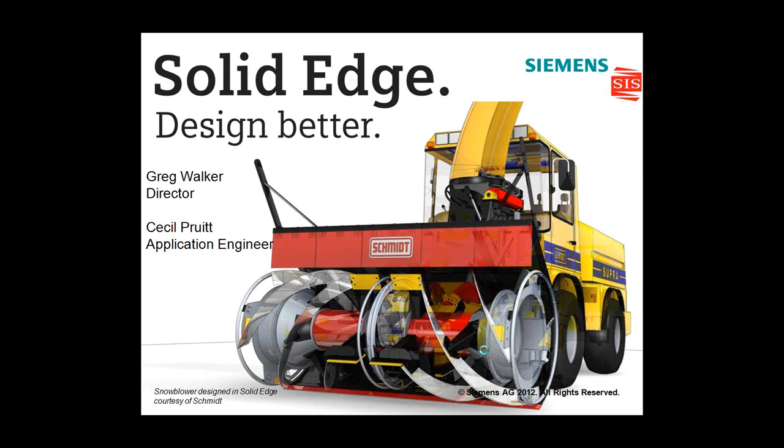Before we get started, for those that don't know, SIS has quite a bit of capability besides just the CAD/CAM/CAE support we do with Siemens. We're really divided into four sections. Part of our business focuses on digital data capture for reverse engineering, space configuration, factory layout, and that type of thing. Basically, whatever you need to get into 3D, we address, and we can do that.

We can prototype, and get everything from 2D or as-is condition in real life into a 3D environment. The other thing you're more familiar with is our capability and focus on engineering analysis—the CAD/CAM/CAE side. We're pretty much a Siemens shop.

So Solid Edge, NX, FEMAP, Teamcenter—basically the entire product line our team supports. We work with Siemens; we've been a partner since 2000, and we work heavily in the Mid-Atlantic and also with the Navy team specifically, so we have a lot of Navy background and experience. When you go down to the lifecycle management aspect, that's where we talk about Teamcenter Express, Insight, and Insight XT. Insight XT is a new capability with Solid Edge ST5, and we'll touch on that today.

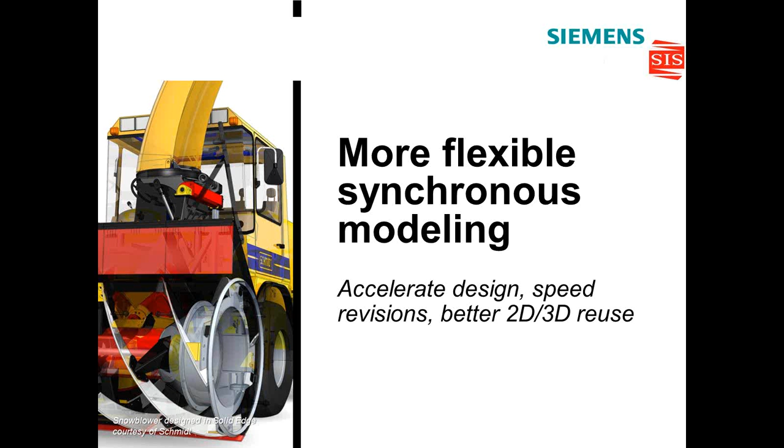If you are not a synchronous user, then hopefully you and I have at least talked so that you understand that everything doesn't have to be synchronous. But to not take advantage of some of its capabilities would be doing you a great disservice. And ST5 is just one more reason to take advantage of the new capabilities.

Within ST5, we've introduced some new functions you might not have ever seen before. For example, now we have included something called multi-body modeling. If you've ever encountered a file from another product, maybe even NX, where they have put multiple bodies inside one file, well, guess what - now we have that capability also.

And not only that, but we've pushed it up a notch so that we can even take multi-bodies within a single file and publish them out into assemblies. Very useful tool - I've even used that myself lately on some custom projects.

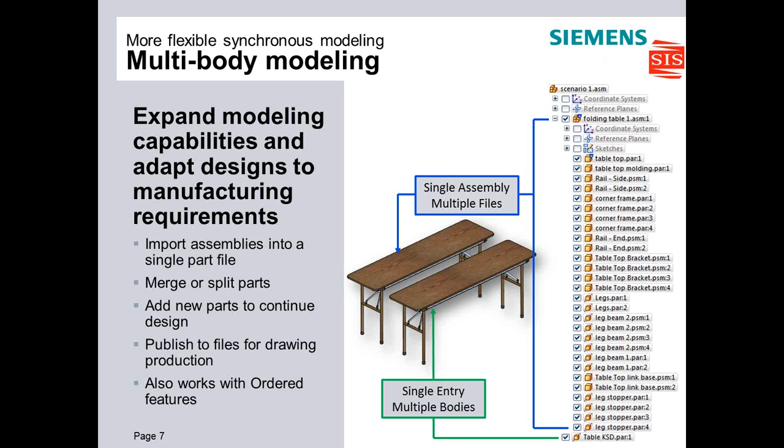You now have capabilities of being able to edit many procedural features from the assembly itself. No longer do you have to double-click or in-place edit into a part just to make a simple change.

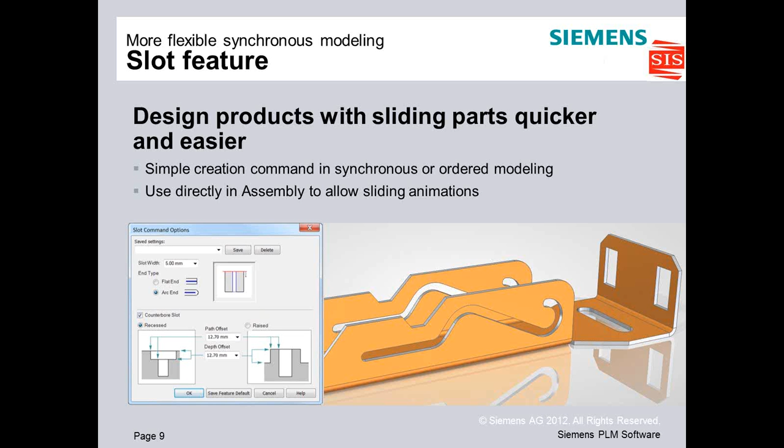We've introduced the new slot feature. Everybody has been asking for this for years now, but now we have it. The slot feature is very powerful. It has both negative and positive features. When I say negative, I mean we can do both counter bores and also boss type features within our slot command. Very nice feature to add.

We've now even introduced hole recognition. I'm very excited to show you this one. This ups the ante on product conversions, being able to do a translation from a non-Solid Edge part over to a Solid Edge part, and being able to recognize the holes as they come in is priceless. It's awesome.

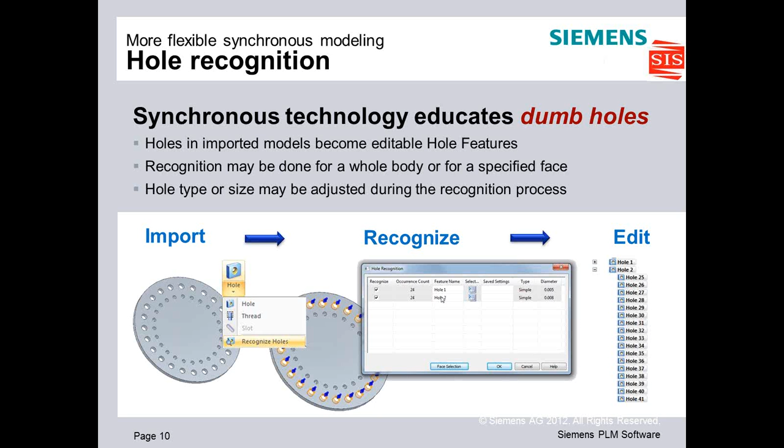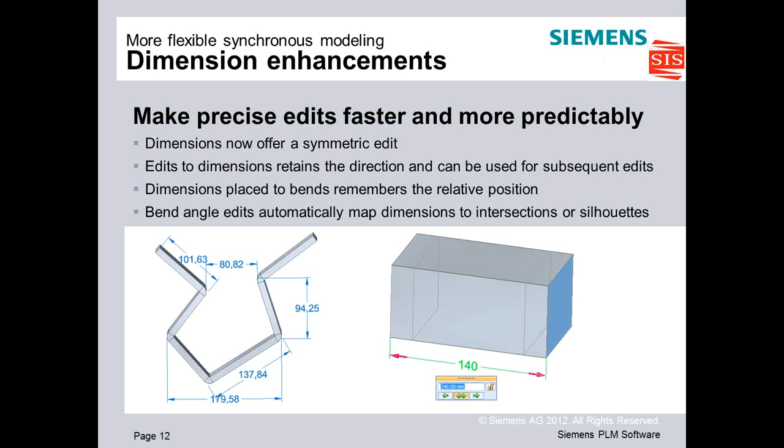We've now introduced more ways for dimensioning. In the past, we had the ability to dimension to intersections and theoretical intersections, and now we can actually dimension to the actual tangencies of things like sheet metal parts. I'm also pleased to show you that we can now adjust our dimensions symmetrically. Very cool stuff to show.

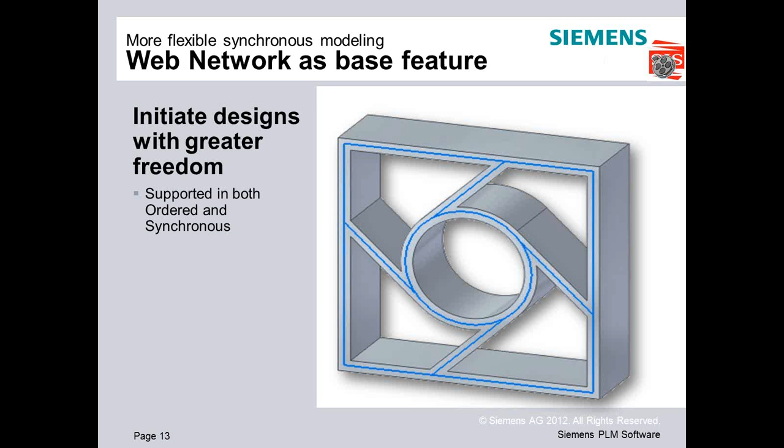A couple more here. I don't know a lot of people who have begged for this, but as I've started to examine the use of this tool, I can see where some people can get excited. We now can add web networks as base features. We don't have to have a pre-existing feature to add in a web network, which is kind of cool.

With that, I want to shoot off some really quick product demonstrations, and then we'll come back and do some things like steady-state heat transfer. So what I'm going to do is flip over to Solid Edge. I've got some parts already lined up because we want to try to stay within the time frame as much as possible.

This is something you'd normally see within the sheet metal environment as a contour flange. Whenever we think of this, we think, oh well, if I had to do this as a contour flange, I'd probably have to get rid of these corners. Or worse yet, maybe I want to keep the corners. So how would I get this done? What if I needed to do this inside a part environment instead of the sheet metal environment, which is kind of where I'm at? So it's not the typical runaround you'd go through to get this part.

It could be just as simple as reaching up, choosing web network, grabbing a chain, and determining both your thickness and your depth. Maybe we'll make this guy 5 millimeters thick, and we'll make this go out 20, that's fine by me.

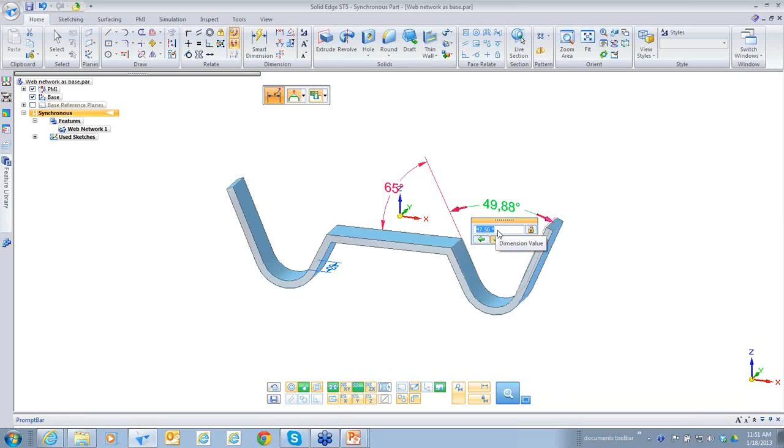Something interesting to get your appetite going. I heard Greg make a mention of someone saying maybe Solid Edge synchronous might not be right for you at this moment. With that said, the hairs on the back of my neck kind of prickled up, and I said, wait a second here. I want to show you a real world example.

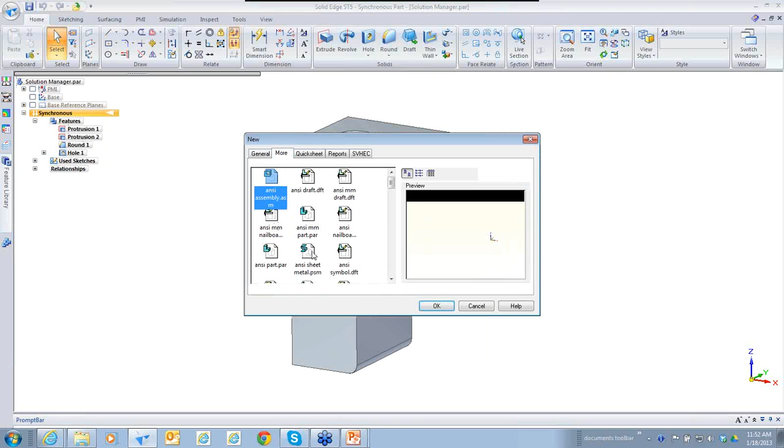Specifically, I have a CATIA part. This CATIA part, of course, makes no distinction between sheet metal and part. I'm going to go ahead and open this fellow up, and as I open him up, I'm going to bring him into the Solid Edge sheet metal environment.

And as I open this fellow up, I want you to take a look at the problems that are here. You might think, well, what problems, Cecil? This looks like a very typical piece of sheet metal, no big deal about it at all, right? Well, it's got some problems.

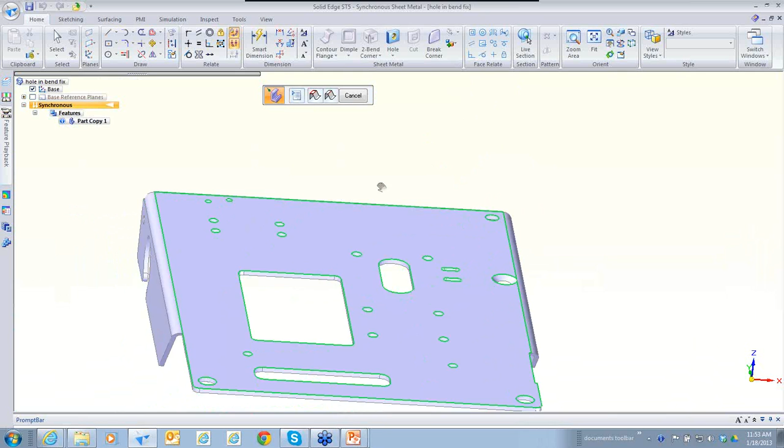First of all, if I were to reach in here and do my typical convert to sheet metal, I'm going to end up with errors. I'll say transform to sheet metal, grab it, and it's going to tell me there are non-sheet metal faces that have to be removed. Where in the world would that be? After examining the model this came from, I saw there's a countersunk hole transgressing a bend. That's not going to unfold. Not only that, but this bend is not quite what I want.

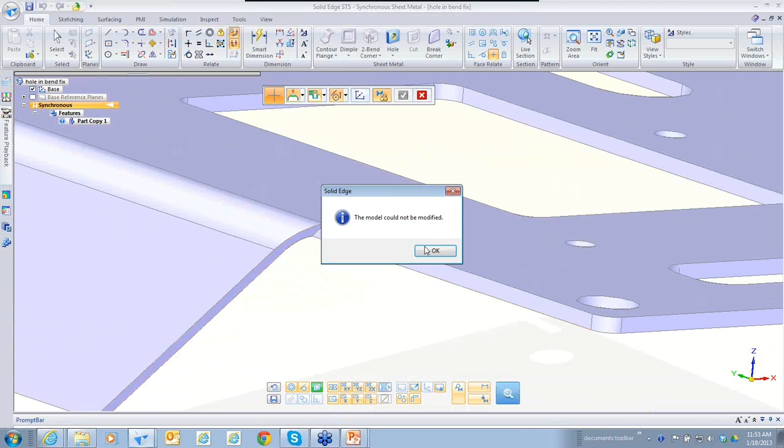So Solid Edge with synchronous gives us tools to come in and make very quick modifications. I might reach in here and say, hey, I really wish this face... well, let me try a perpendicular. Let's grab this face and make him perpendicular to this face. That was a very, very quick resolution to this. And from here, we could of course change it, modify it, do whatever we need to do.

The other problem, as I said before, was this hole. Let me go ahead and say transform to sheet metal again, and it's going to tell me again that I still have this problem. This hole is transgressing this bend. What can we do about it?

If you were working inside the synchronous environment, you have a solution. If you were working in the ordered environment, well, guess what you've got to do? You either have to delete it and put it back and then repair the bend, or you have to live with the fact that you can't unfold it.

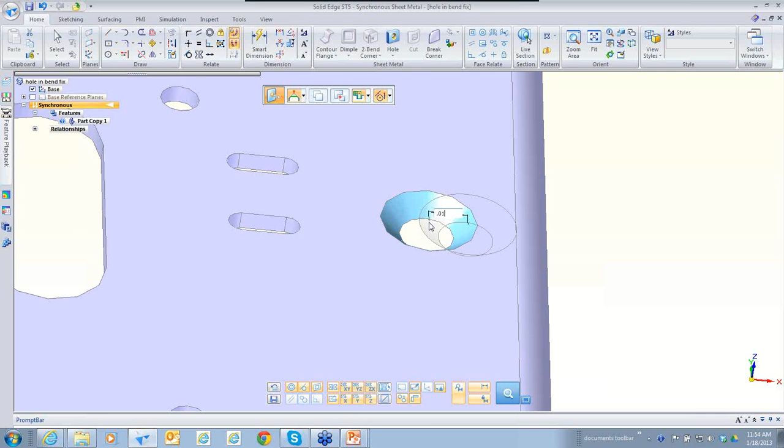I want you to watch what happens in the synchronous environment. I'm going to go ahead and grab this hole and move it. You might think, well, okay, he can move it. I'm going to move this guy over 0.01 inches, just so it gets off of the bend itself. You might see a little bit of a jaggy edge, let me pump this guy up a little bit so you can see it. So now you can see that it does not transgress the edge.

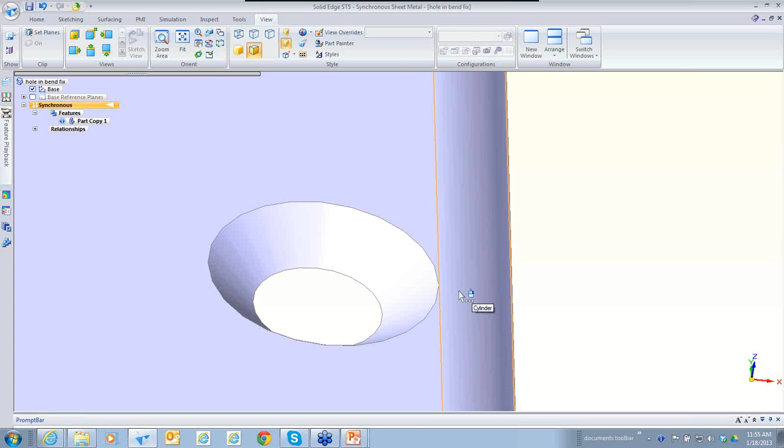Not only does it not transgress the edge, but look at my bend. My bend does not have an arc in it anymore, meaning the bend healed itself, and you won't get that inside ordered. So with these two modifications, I could come back now and say, let's go ahead and do that transform to sheet metal. And sure enough, within one click, I went from a hopeless part to a tab and 3 flanges.

Now, obviously, we want a little bit more, right? So from here, I'm going to reach back over here and say, I sure would like some holes in this. I'm going to choose to recognize holes, and look what I've got. I hope you can see this, it is recognizing these holes. It even recognized the taper hole. Go ahead and click OK.

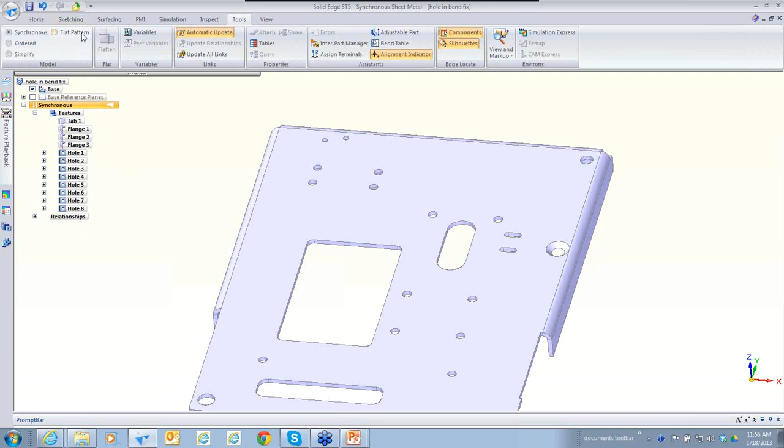And now I have a full-featured sheet metal part that, of course, whenever I choose flat pattern, I have a valid flat pattern now. So just that in and of itself is amazing.

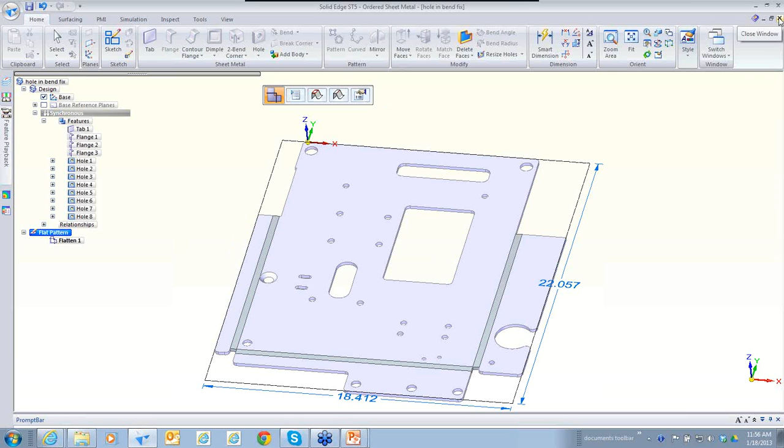It's absolutely amazing. I get several support calls where people ask, why won't it unfold? Why can't I recognize this as sheet metal? And I want to say, learn a little bit of synchronous and you can do this. But obviously, inside Solid Edge, we have the ability to be both synchronous and ordered at the same time. Anyway, I wanted to show that one because I thought it was really cool. But let's get more on to these rapid-fire demos here.

The next demo I'd like to show you is a really cool one. I don't know how great the detail is as far as resolution goes from the GoToWebinar perspective, but there's a missing surface here. This missing surface is very typical of what we encounter whenever we import things like Pro-E and CATIA, where faces are just flat out missing.

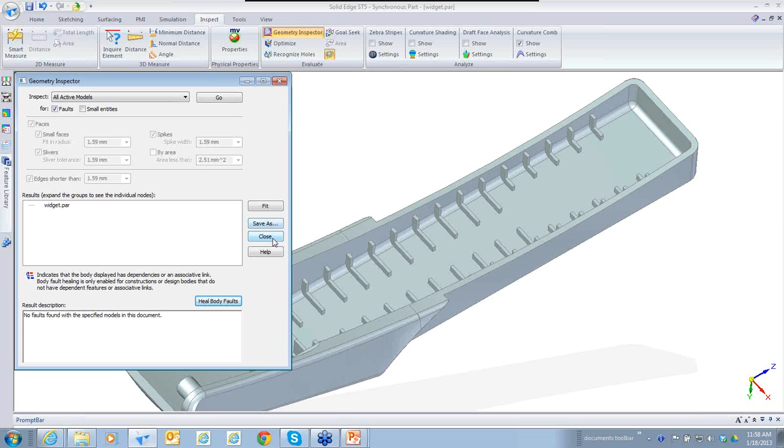I want to show you a cool tool that came in with ST5. I'm going to go under Inspect and choose Geometry Inspector. Within Geometry Inspector, I'll tell it to analyze this part. As it analyzes, it says it found two faults in here. If I go in, I can actually see it has some problems. I'm going to tell it to heal itself. As I click on Heal, and do a quick close, now we can see that we have a valid part.

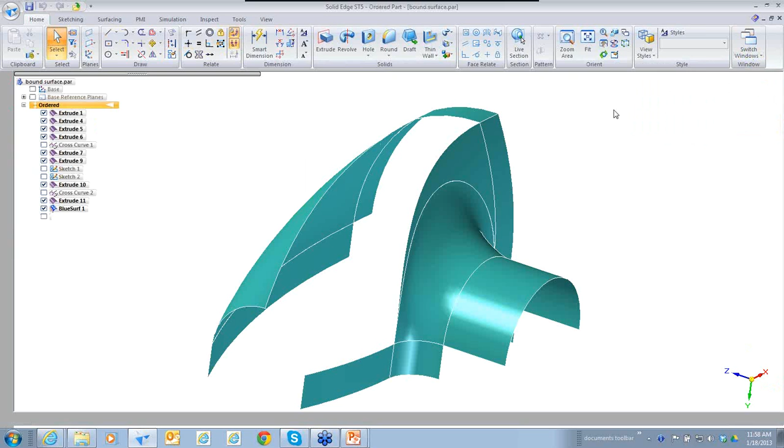That in and of itself will save you hours of surface modeling. When surface modeling comes into play, you know you're in the advanced areas of CAD. This is awesome. I'm going to close this out, get it out of the way, and show you once more. That's not the one I want to show you, but I do want to show you this one.

If you're into surface modeling and you want to take something like this and heal it, because this does happen, I'm going to reach under my surfacing tools and choose our new bounded surface. This has the capability of healing things both faster and with more robustness. In this case, full merge is good, I don't need any of these other options, I think that's just fine.

What I want to do is grab, not chain, but single. I want to grab this edge, and I've got an extra curve out here. I'm just going to go ahead and say, yep, that's what I want. Now it fixes it, and you would expect it to fix it.

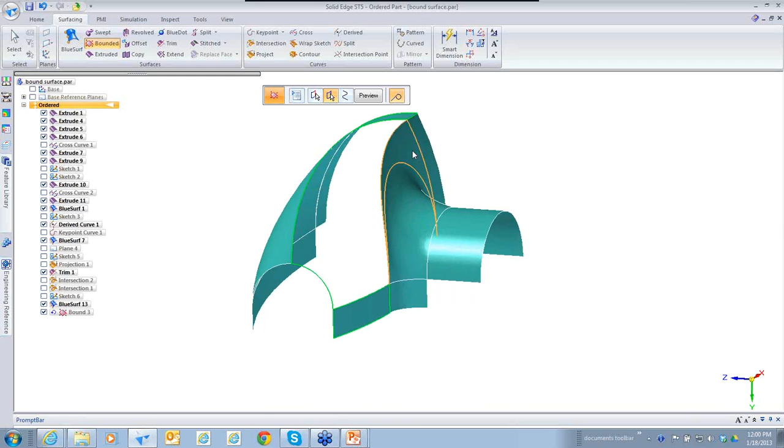But if you know much about surfacing, that's probably not what you want. So I'm going to change the faces that are tangent. I don't want them all to be tangent, I'll grab tangent surfaces, but I don't want that one, so I'll unclick it and unselect it too. Now I'll just go ahead with my preview, and now I get a surface that I'm much, much more satisfied with.

So surface technology, if you thought it was out of your reach or out of your range of study, it's really sitting right there at your fingertips. All right, so what have I got next? Oh yes, definitely want to show you this. I'm saving this last one because it's something I know you're really, really going to want to see.

Look at my dimensions. They're all set, not driven, of course. They're not red, not locked down. But what I want you to see is this: as I click on dimensions, notice I am selecting this dimension at the theoretical intersection of these two. So now as I change the direction on this, you'll see we have the editing capabilities, which you probably already thought would be there. But also look at this fellow, in the same way he's adhering to a different intersection.

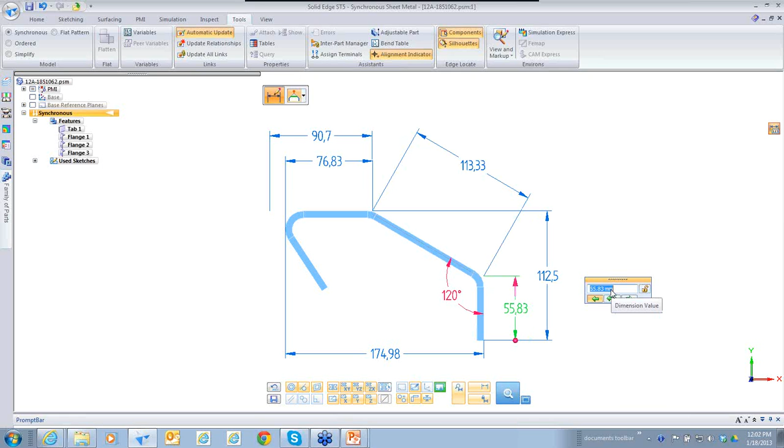Also, of course, from here we've got what we'd already think of as our height. Well, actually, that's a curved one, I shouldn't have done that one. Let's grab this fellow right here. The thing you want to take away from this is that we have the ability to go one direction or the other, and now in ST5 we can go both directions as far as height goes, or as far as linear dimensions go. Let's see if he's going to go. Yep, he'll go, and they do what they're supposed to do. In ST5, our dimensions remember the way that we originally selected them.

So, for instance, if I were to now click on this fellow, you'll notice that he's not choosing a different direction. That's the original direction that I told him to move. In this case, I chose this fellow to move this way. But if I were to now change him to go two directions...

Switch back over to this fellow, he remembers his direction. Switch back over here, he now remembers the direction that he was in last. This is going to be a big relief for you guys that do a lot of editing. All right, so with that said, I get to come up to this fellow.

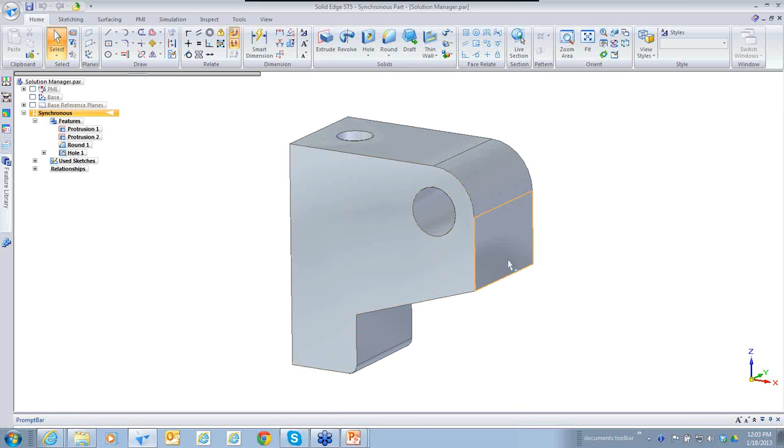Live rules. Everybody loves and also cringes at live rules. Why? Well, first of all, live rules has all these little icons. These icons, once you become familiar with them, are just easy to use. Now, with that said, I'll fumble from time to time, but one of the drawbacks from the previous live rules were you didn't know why something failed. Or if you did know why something failed, you didn't know how that you could fix it.

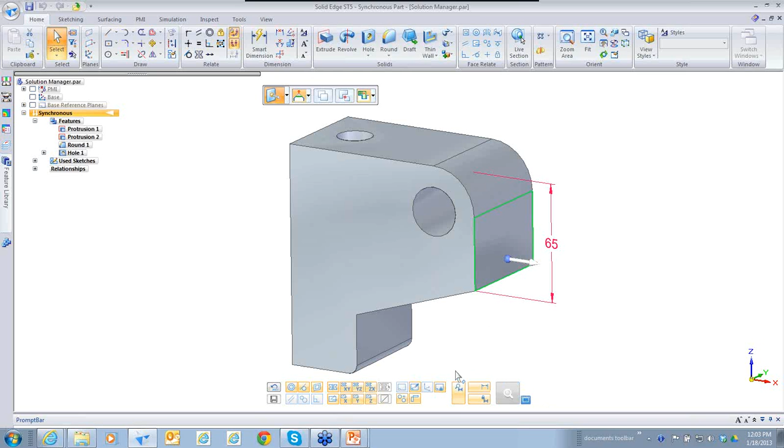So with that said, I want to introduce to you the new Solution Manager. These extra icons down here. So for example, I'm going to grab this fellow right here and I'm going to pull. Notice that he has a problem. So I'm going to go ahead and click to finish out the edit, and it's going to tell me, hey, with Solution Manager turned on, I've got some reasons why this guy failed.

What are those reasons? Well, first of all, they're denoted by color. Look up top. The blue says, hey, I'm good to go, I'm editing, no problems. The orange says, something over here is not quite where we want it to be. And the black over here says, hey, I'm staying still. This is a grounded face.

So as I do this, I might say, well, what is it that I can do? And as I move my cursor, notice the little exclamation point there. I'm going to reach over here and say, well, now that I moved it over something that had problems, I'm going to right-hand click, and it will literally give me options. In this case, I'm going to say, well, do I want the concentric to change? No, I don't want to do that.

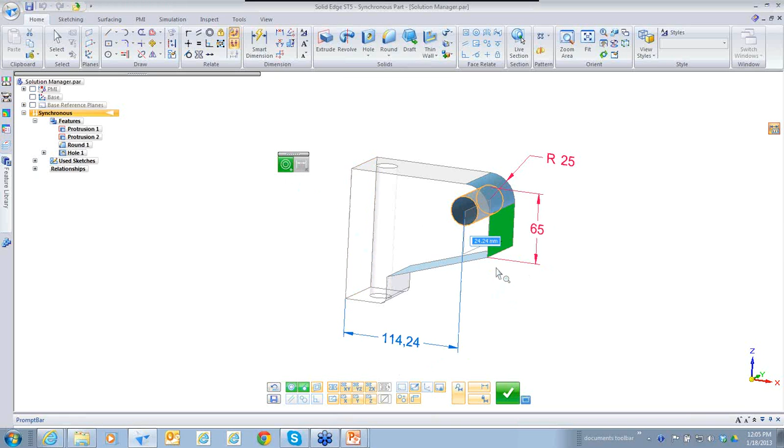Maybe I want to look over here and look at the linear dimension. Well, maybe so. And as I click on that linear dimension, it is going to allow me to make changes through there. So I might say, well, maybe I want to make that change. If I were to click now... let's see, let's go back on that.

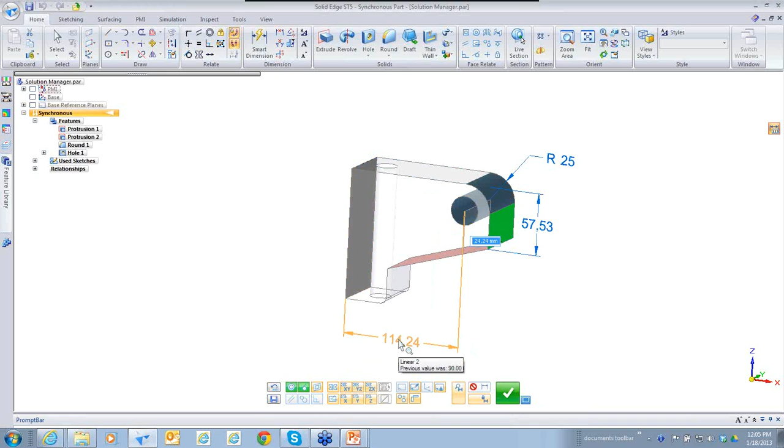Let's grab this guy and say, what I would really like to do is relax a specific dimension. So as I click on relax dimension, it will literally take the offending dimension, the one that's holding you back, and relax it so that you can finish the change. Now I go ahead and click accept solution, and my product has now changed accordingly.

And what's cool about this is that if I were to grab it one more time, it gives me the same error. And you're thinking, what? Why is that cool? Because it took a dimension that was relaxed and put it back in the lock state, which is what we wanted to begin with.

So lots of cool stuff. The Solution Manager is fantastic. It has more settings than what I've shown you, but it's a great tool to figure out why it is that maybe your model, even though you told it to do something, is giving you errors, and you're thinking, well, I know I put intelligence in it. Now let me work within the rules that I set up. Excellent, excellent tool.

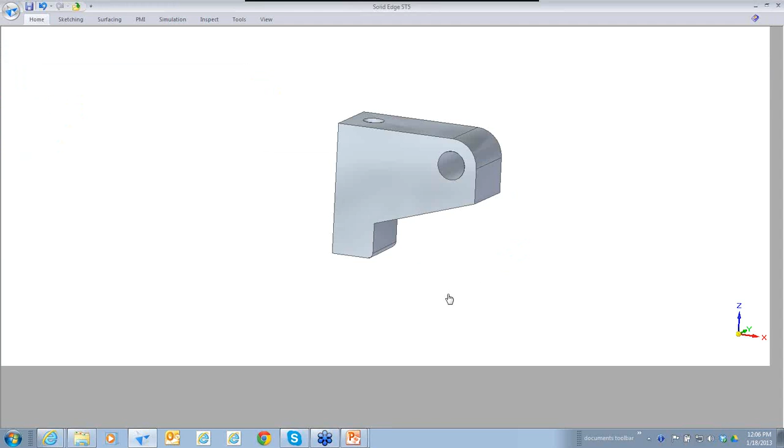Okay, so with that said, as far as time goes, let me see how well we are. Ooh, we're at 12:06. I've got 3 other parts that I would love to show you. Actually, let me show you a couple of 2D things real quick because I know it's important to you. I'm going to reach in and open up, let's see, we've got... let me find that silly thing.

Duplicate elements. I want to show you this. This is a cool tool that those of you that came out of the AutoCAD environment would really appreciate. This is, of course, a plant layout, or in this case, a bathroom layout.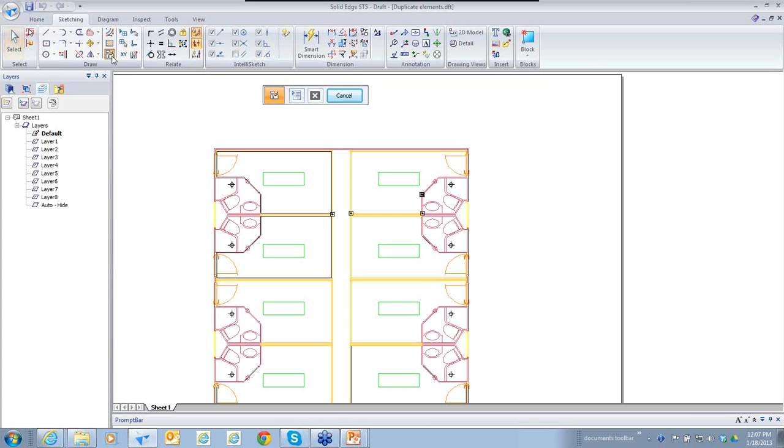And we now have a new tool under the sketching environment called Sketch Cleanup. This is fantastic. Now, what can it do and what can't it do? If I click on Sketch Cleanup and look into the options, I can do things like delete elements that are identical, delete point elements, delete lines and arcs that have a minimal distance. These are common errors that you would see inside AutoCAD. You can also clean up B-spline curves.

There are a couple of rules I want to give you if you want to jot this down. First, the clean sketch requires that all relationships be removed. In this case, I have some relationships that I intentionally put in, and I want to make sure those are taken off. It also will leave elements if they exist on different layers. So if you need to merge your layers first, go ahead and do that. If you're not going to merge your layers, then if one line is on one layer and another line is on another layer, they'll stay that way.

But look how many lines are beneath that one line that I picked, and that's always been a problem. So how am I going to fix this? I'm going to reach over under my select, and if you didn't know it, every single button has its own solid edge ribbon bar, and the select tool is no different.

I'm going to reach under the filter for my select, and I'll say, I'd like to just select relationship handles because I really don't want to spend time trying to pick these things. Now I'm going to box it, and it finds all my relationship handles, and I'll just do a simple delete. Wham, they're gone. Now, if you've been in my training classes before, I've told you solid edge is modal.

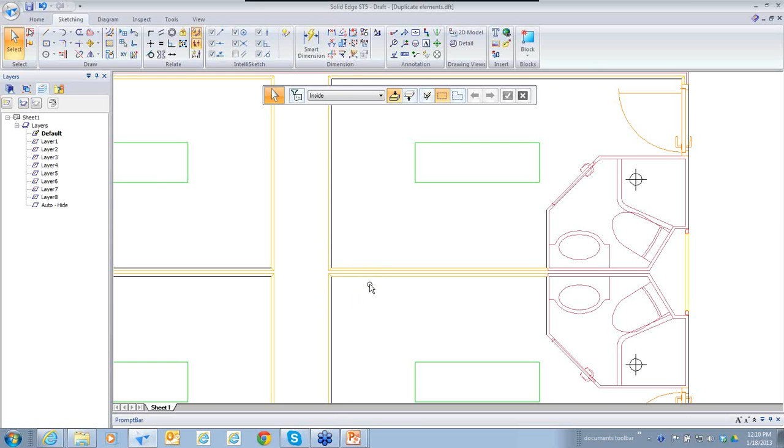And if I wanted to get rid of all the lines underneath there, I would need to combine my layers. So neat, very neat tool, especially whenever you get into those pesky AutoCAD drawings.

Let me go ahead and drop this fellow right here. I'm going to show you another semi-quick, rapid fire. What I want to do is pull in, I would like to pull in, should say, multi-position. Assembly, thermal. There we go, multi-position. I'm going to open up this actuator.

And it's going to ask me where I want to start out with. I'm going to start out at a 0-degree position with this. This is a family of assemblies. And with this, if you haven't been into families of assemblies, then it's kind of cool.

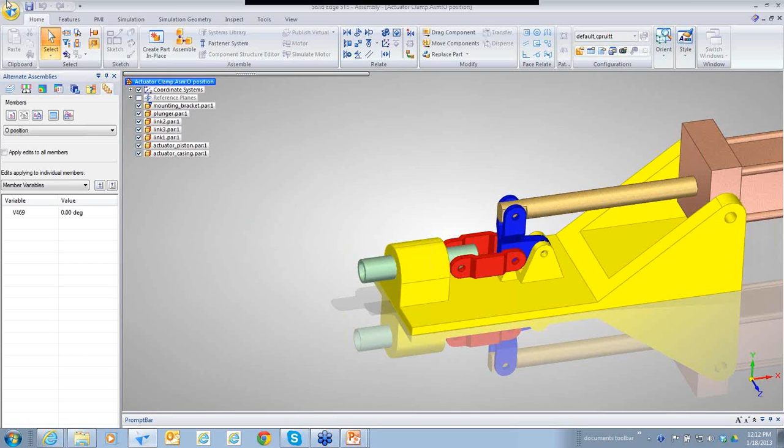But now that I have it made, I really want to throw it to a draft file. What is one of the things that you've always wanted to do with families of assemblies? You've wanted to show them in their various different positions. So in this case, let me turn that on. We can see that in my table I have 4 different positions. I'm going to say new, and then come down here and create a drawing from what I have. And I'm going to throw it to an ANSI draft.

The very first dialogue that comes up whenever you insert a family of assemblies is which position do you want to be primary and which one do you want to be alternate. I'm going to choose 0-degree position to be primary, and I'll choose 45 to be alternate. From there, I might choose next, and once more, I want to choose what's going to be my first view. That's not my first view. That's my first view. Go ahead and close it and place it.

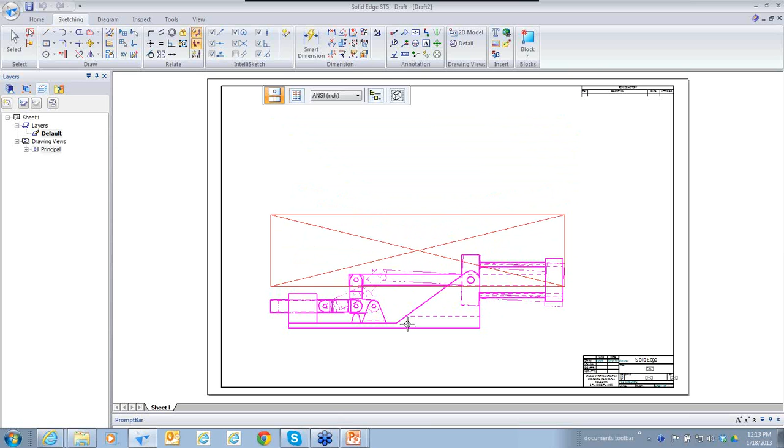And if you didn't know, in ST5, you don't have to reach over there to the principal view anymore, because now the principal view is automatically enabled, which is kind of cool.

All right, well, I only needed one, but this is what I wanted to show you. Isn't that cool? So now we get the little ghosted images to let us know what positions are what. It's a very cool tool, especially when you have moving parts. All right, so let me go ahead and throw this guy away. Neat tool, very cool to be able to use.

From here, wow, it is 12:13. I have to make this pretty quick, and I want to show you some of the best parts here. I'm going to open up something that has multiple demos within it.

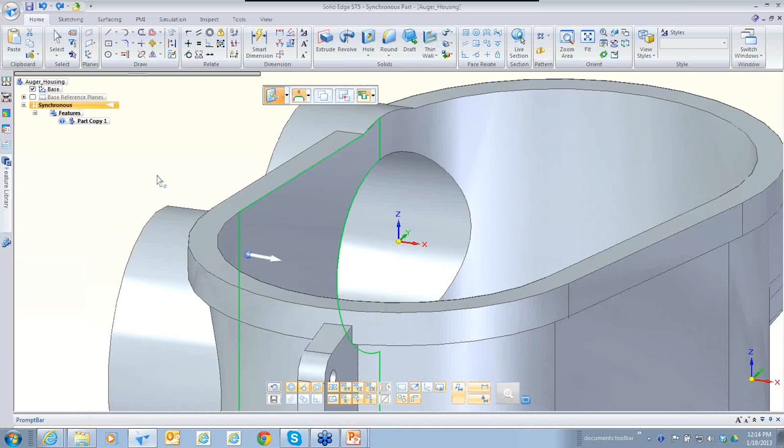I would like to grab, yes, this is what I really want. Many times what you'll find out as you open other parts, a step file, and I'm going to do a quick convert on him. So I'm going to go ahead and say open him up, and I want him to be an ISO part. And as I pull him in, as he's translating in, there he goes. I'm going to go ahead and pull him out like this.

Once more, this is an ideal solution that we might use to recognize holes. So in this case, I'm going to say, once more, hole, recognize holes. And here, I'm going to go ahead and make some changes before it even occurs. Notice it found both all my simples and my counter bores. So I'm going to say, you know what?

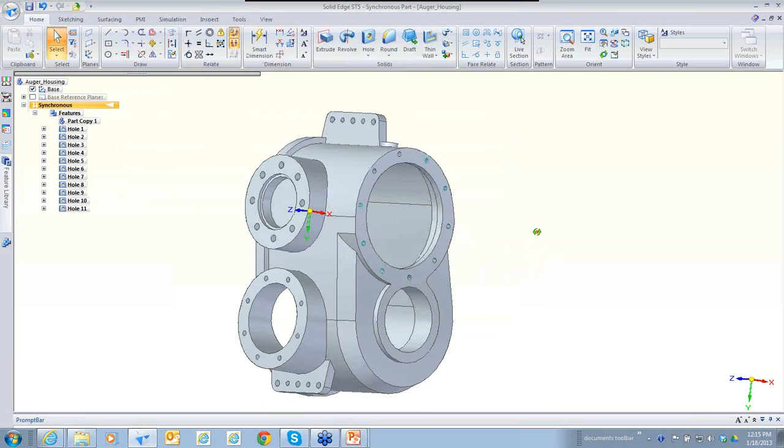I really would like to make this into a threaded hole that was 12 millimeters. Click OK. I'm going to do it to hole extent, and that looks good. Hole depth, I'm going to try this hole depth at 30. Go ahead and click OK. And what you'll see is that we have now changed the holes, even before we even pulled it in.

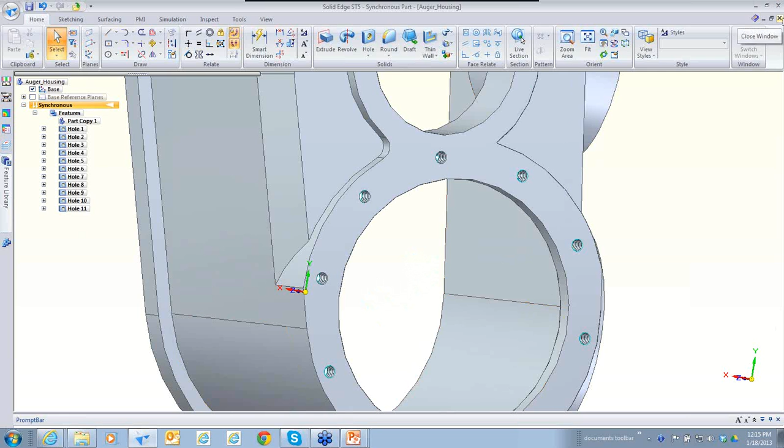This is fantastic, especially whenever you import those parts from Grainger and from McMaster-Carr, and they come in as dumb solids that don't have the threaded holes delineated in them. Well, that's kind of cool. I'm going to go ahead and say File, Save As, and I will go ahead and just save him in there.

All right, I'm going to build off of this, and I'm going to open up blade auger. Now, you've seen this demonstration before. Before it goes away, look down this line right here. We have changed. I'm going to have to open it up again in order to show you.

If I were to highlight an assembly, we now have automatic open capabilities whenever we deal with how large our assemblies really are. So this helps us out as far as knowing what should be simplified, what should not be simplified, what should be activated, what should not be activated. If this were a small assembly, it has different settings if this were a large assembly.

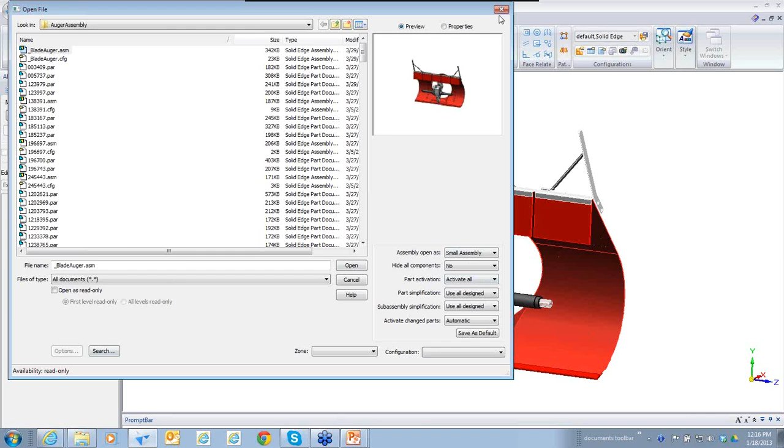Notice now on this one it inactivates all. Go back to small assembly, and this is activate all. So this helps us out without us forgetting to activate things. I'm going to go ahead and get out of this and come back.

All right, so I want to show you some cool stuff. Hopefully I've been showing you some already. One of the coolest things that I've seen inside the assembly environment now is this.

If you were to reach under here, and remember, this is assembly, so I'm going to choose Face Priority Select within my assembly. I don't know whether or not you recognize it, but there's that auger housing there. And this guy, he has 12 holes, not 10 like we wanted.

So what does that mean for us? Wouldn't it be cool if you could select a pattern? Wait, remember, I'm in the assembly environment, and change that fellow. Let's go back over here and hold on. Oh, my change was covered up. Pull that guy over. I'm going to change that count from 12 down to 10. I just made that change in the assembly environment.

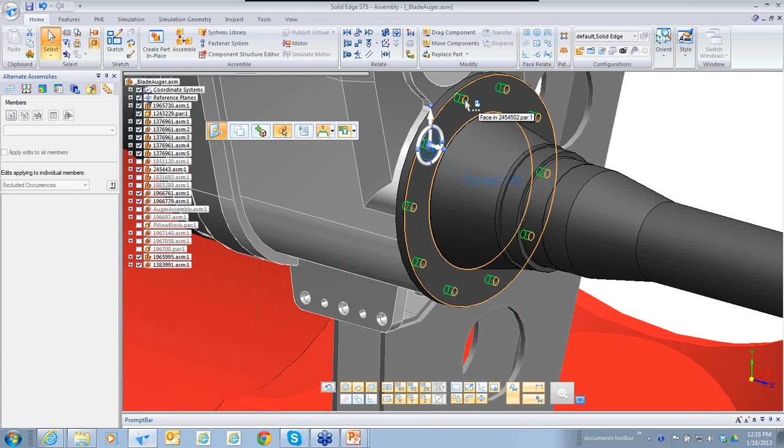Can you think about how much time you will save yourself not having to dive into a part in order to get at one little hole or one pattern?

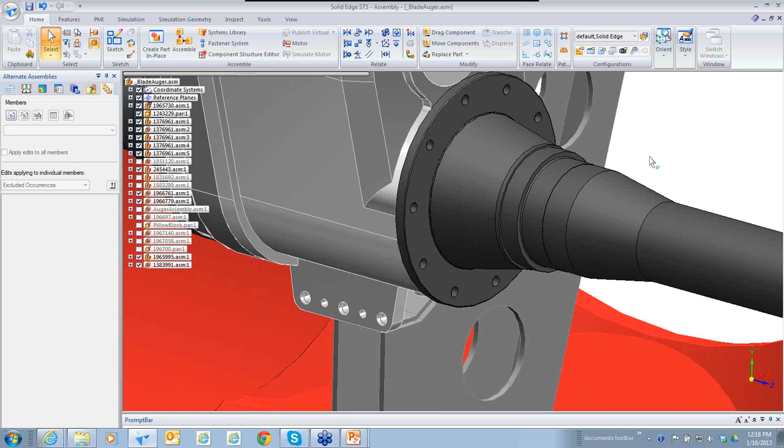If it is a procedural feature, you can grab it without having to dive into the part. This is fantastic news for us. All right, sitting here at 12:18, I think I can do this.

Here's another great tool. The replace part has not only been modified, but it's been enhanced. What am I talking about? How many times have you found several different parts of the same and you've thought, man, I just want one of them to be different?

Wouldn't it be cool if you could reach over here and say, I would like to find this assembly, and that assembly really needs to be different. I'm going to right-hand click on it. I could right-hand click on the other side, or I could right-hand click here, but I'm going to go under the More dialog, and I'm going to say, hey, what is this new stuff? I've got not only replace part, but I can replace parts with standard parts. I can replace parts with parts that I want to create on the fly, and I can replace parts with copies. Ooh, that opens up a lot of doors.

So now I'm going to say replace part with copy. Yes, that's the one I want to replace. So I'm replacing this assembly with a different assembly. Now I'm going to call this -1. I'm going to go ahead and say save. And now you'll see in my Pathfinder that that's been changed.

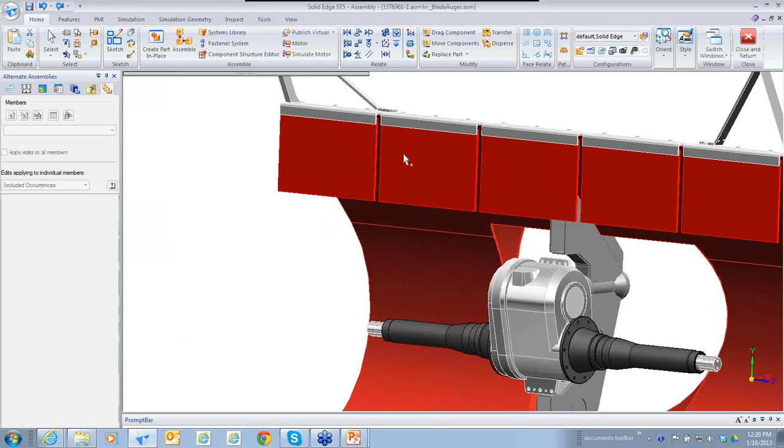That's awesome. So now what I'm going to do is an edit in place, and now I'm inside the actual assembly itself. Once more, I need to make a change. I want this part to be changed. I'd love to put the logo on that. So once more.

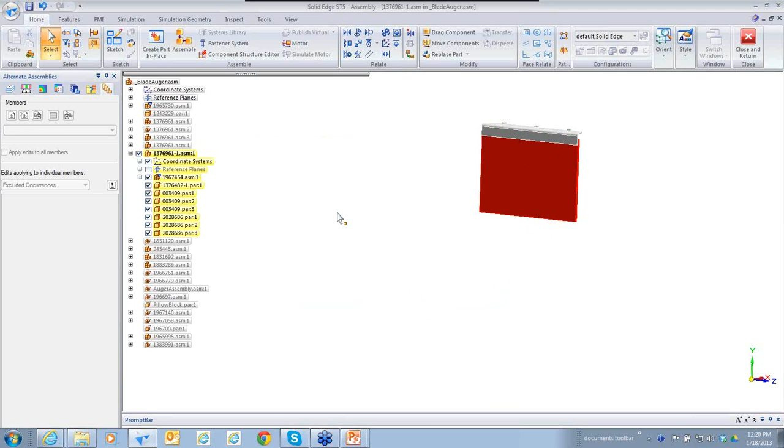Replace part with copy, and I'm going to say yes, that's what I want. I'm going to pull this guy out once more as my revisions go, -1. And now I have a completely different part here. Well, let's make it different now.

So I'm going to reach over here and say I'd love to edit this fellow. Editing. And I'm going to insert a neat little part copy, and that part copy just happens to be called logo. There's the Schmidt logo. Go ahead and choose open. And there he is. Now I'm going to go ahead and finish him.

And right now, he is a construction body. If I were to click on him and choose to pull him down, I'll just pull him down about 180. Try 185. Perfect. You might think, well, that's great, Cecil, but it's a construction body.

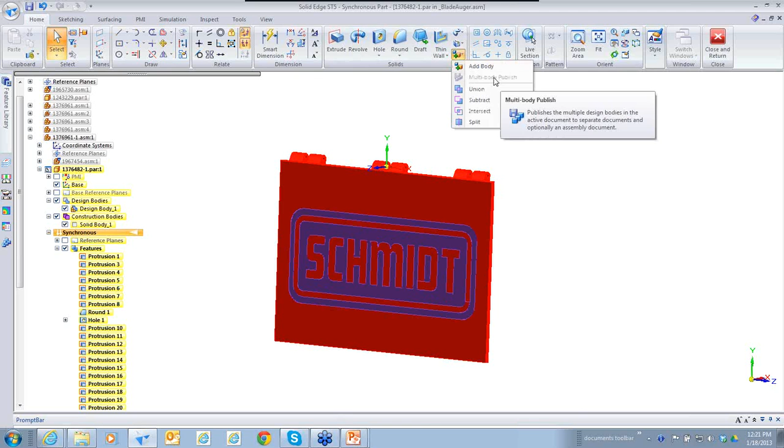Really? We've now introduced multi-body publish and add bodies. Right now, he's not really what I want him to be, but if I were to take him and say I would like to change you, he is now changed from a construction to a solid body. Oh, that's pretty cool. I now have two solid bodies in one part.

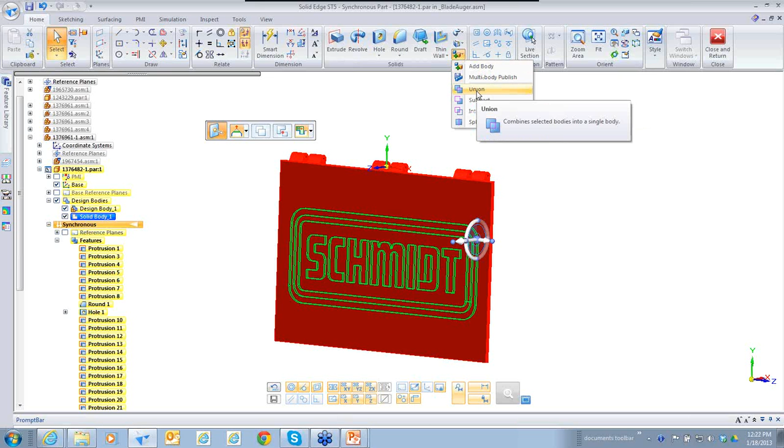Well, I don't really want two solid bodies. By the way, if I desired to, I could click on multi-body publish and make it an assembly, but instead I really just want to union the two. So if I union the two, I want to union this fellow and this fellow. They now become one part.

Pretty darn cool. From here, just for the heck of it, I will reach over here and say part painter, and say I would love to have here. That looks great. Close and return. And once more, close and return again. And I have a very unique middle tile here that did not take me much time at all to do.

All right, very quick. This has to go quick.

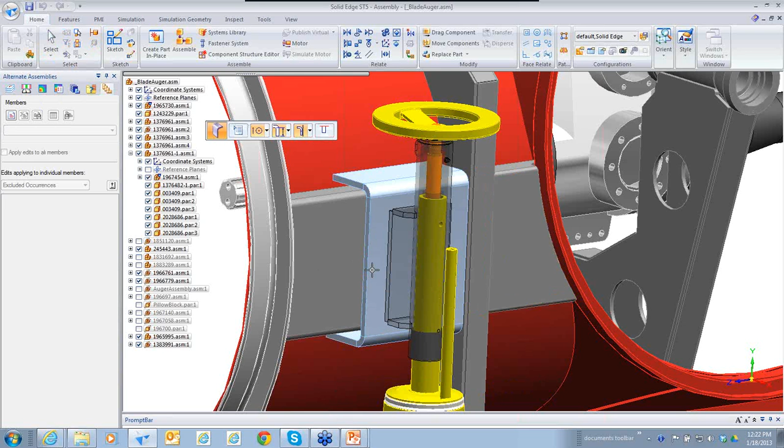Not only can I do holes from the assembly, but if I were to reach in here and do something like this - I really want to do this right. I want to grab this face as well as this face, grab them and say, no, I don't want to go that way, but instead I'd like to pull them to this key point.

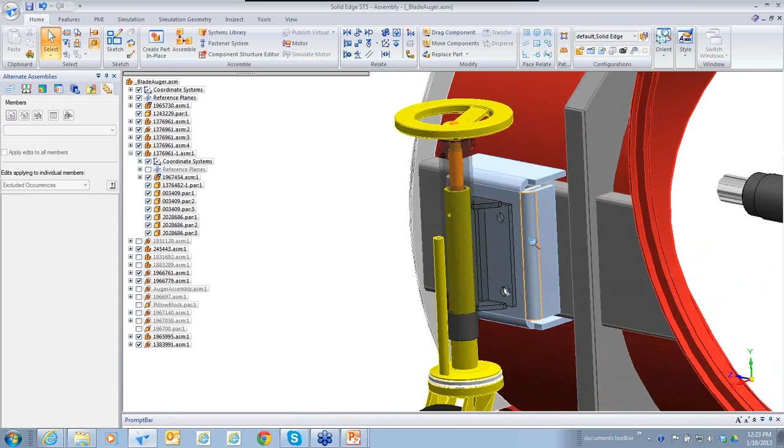From there, I've now adjusted my piece of sheet metal from the assembly. Didn't have to do an in-place edit. So what else can I show you here?

Believe it or not, this fellow right here, this one part, he's still stuck on face. I'm going to choose part priority, and I want to show his sketches because I've got something really cool to show you. In this part, let's go ahead and edit this part. So as I choose to edit the part, here I am.

I want to show off my slot command. There's a line here. Go over to my home, say I would love to add in a slot. Slot works with both sheet metal and with, and of course with parts. And I want this guy to be...

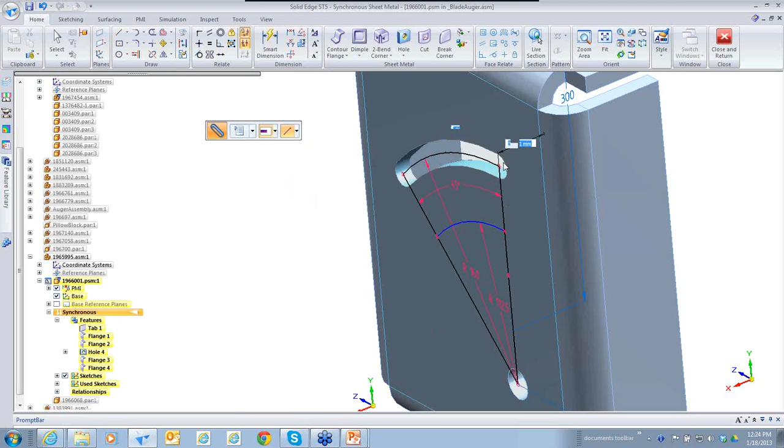Let's go into options. Options need to be a little bit more than that. Let's try 18. There we go, okay, and that looks good. I'm going to just pop him in. And now I have a slot.

Excellent. So what am I going to do with this slot? Well, here I am with a slot. Wouldn't it be cool if I could use that slot for something useful? How about Solid Edge ST5's new path relationship?

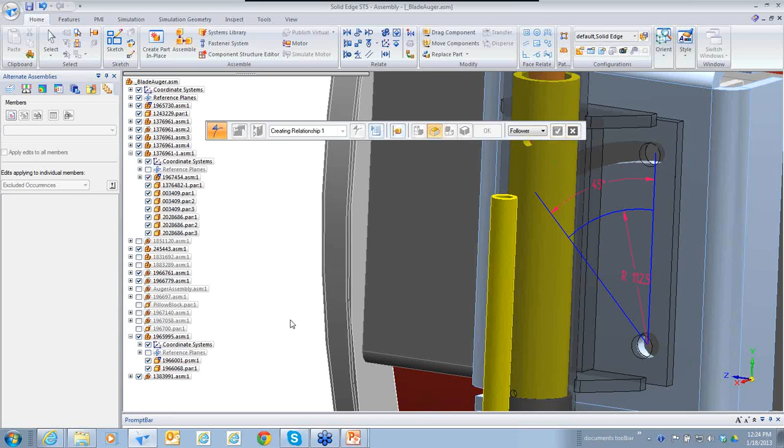What does that do? Well, it gives us the ability to take a part, especially a part that has an axis, and tells it to mate with a part that has a path. Check it off. And now I've just added a new relationship between these two.

If I were to choose drag components, grab, say, this part right here - I hope you can see this. Imagine the possibilities. It is stopping motion at the end of the path. That in and of itself is awesome.

It's fantastic. Well, I'll tell you what, in order to get this thing going along, I need to show you a few more things. I'm going to have to drop a few other things that I wanted to show you, but I'm going to grab right over...

Not that assembly. I'd like to grab, where are you at? Let's see, scroll to, there he is. I'd like to grab both this assembly, that assembly, and let's see, that assembly. And what I really would like to do, providing that my reference plane is turned on...

There we go. I had to get to my reference plane. I'd really like to mirror this. Oh, now you're thinking mirrored assemblies. We've seen that before. Not quite like this. So if I were to choose to mirror the assembly...

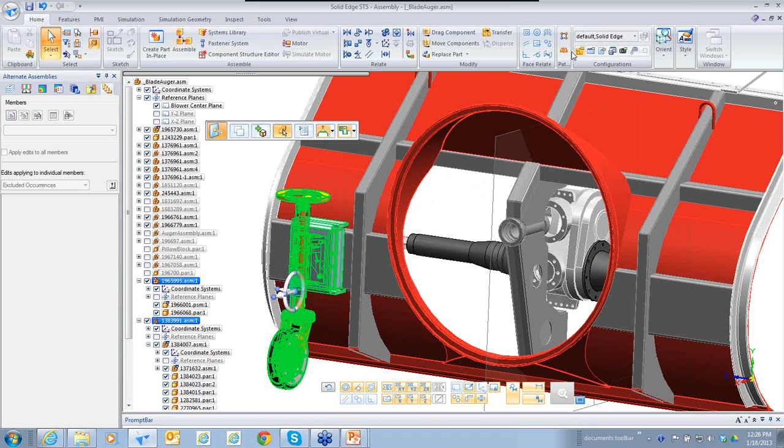Over here, Solid Edge immediately pops up with the dialog and gives us a little bit more capabilities. I'm going to go ahead, just for time's sake, and say yes, that's what I want. And it's going to put it on the other side. As it puts it on the other side, it's going through and making - there it goes - and it's duplicating everything. So this takes just a second.

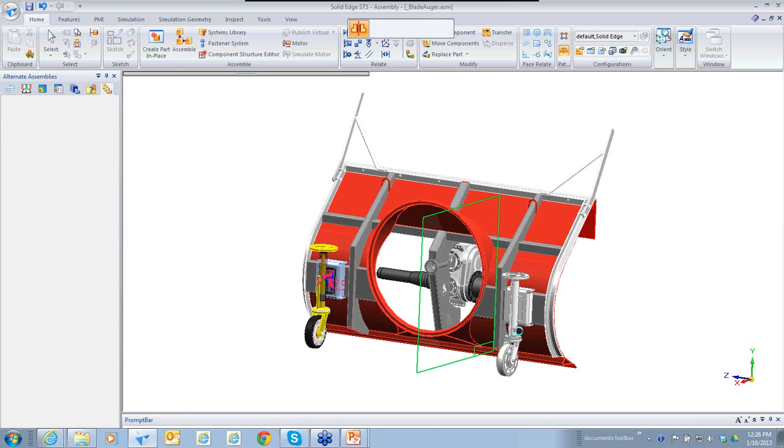But what I really want to show you is what comes up next. Because it is a mirrored assembly, what do you think it ought to do? If I were to grab drag component once more, grab this fellow and pull him down, wouldn't you think the other side would need to update too?

So the mirrored assembly has the ability to be captured as a feature, and in it you can make adjustments through what is called an assembly copy. It makes the overall assembly much easier to work with, and it does not produce quite as much overhead as the original mirror assembly.

Thought you might like to see that.

Let's see, I'm going to go ahead and jump to this because we are running out of time, and I would have loved to have shown you more of the multi-body, but I really want to show you my thermal.

I'm going to reach over here and choose, I have simulation under thermal. Specifically, I'm going to open up something that's kind of cool. I love it when they put real-world applications within these demos. What we've got is a brake assembly, a brake rotor assembly, and I really want to put a simulation on it. I don't really care about stress or the other stuff, but I'd really like to see how heat dissipates. That's a new offering under Solid Edge simulation.

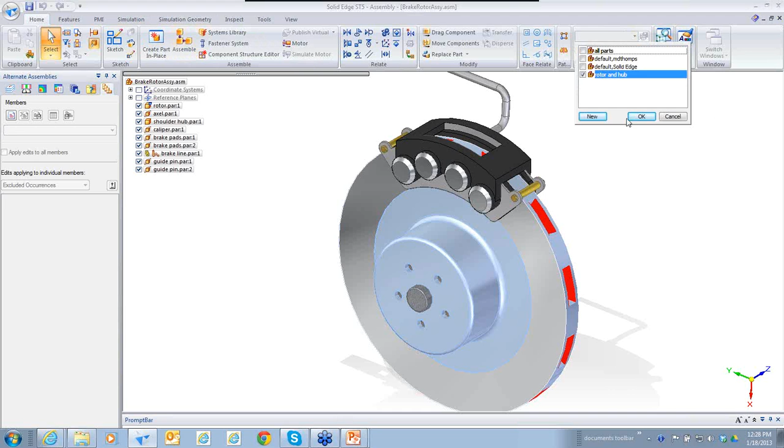In this case, I'm going to reach down and say, you know what, I just want to see the rotor and the hub because that's all we're going to analyze. In actuality, I don't really need to even see this fellow. This is just what I need right here. I'm going to switch over to my Solid Edge simulation.

Now, things to remember: if you have Solid Edge Premium, you have this. Solid Edge Classic, you have analysis over just one part.

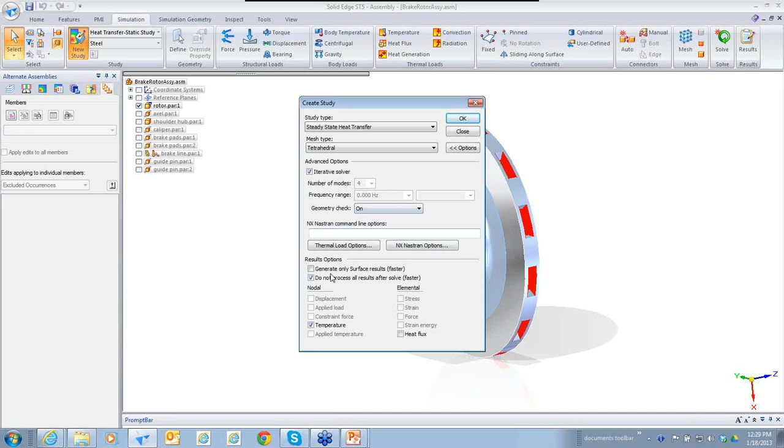So now I'm going to reach in here and say, you know what, I'd really love to go ahead and create a new study. New study, and I'd like for this to be a steady state heat transfer. Notice that I can add it to linear static and linear buckling. With this, I'm going to turn off a couple of things - I'm going to turn off generate surface results, and say, yep, that's what I want to do.

What I'd really like to do is choose this fellow, check him off, so he's going to be what I want to analyze. I'm going to add in some heat flux - I'm going to put heat flux on this face and heat flux on that face where the clamps come down, and put in 1,200 watts worth of energy.

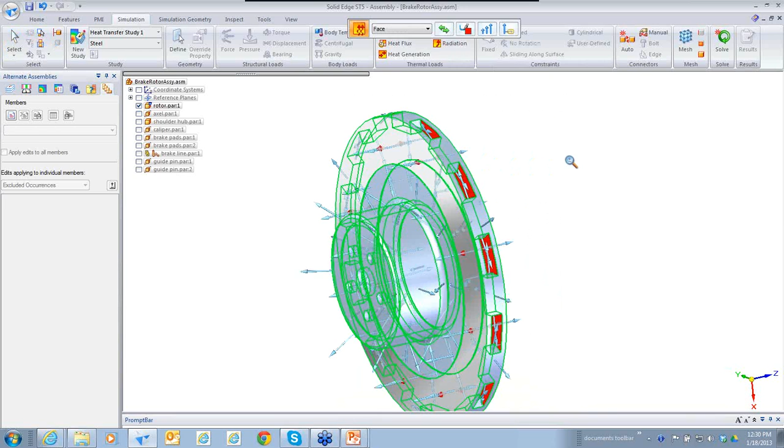Now I really also need to add in some convection load on this to see how the heat dissipates. I'm going to choose convection load, and I really would like to once more grab everything - but I really didn't want to grab everything, did I? I didn't want this face, nor did I want this face. That convection load is about 50, and at 20 centigrade, that's around 68 Fahrenheit, something like that. That's ambient temperature. I'm going to go ahead with that.

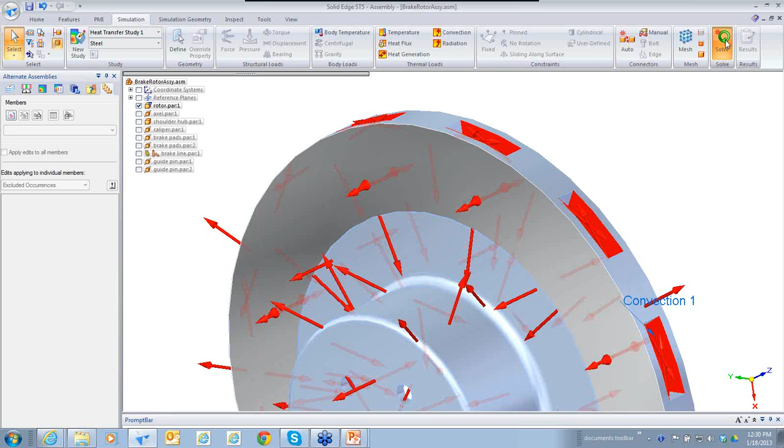That looks great. And what can I do at this point? Well, I'm just going to go ahead and solve. Why can I go ahead and solve? Well, of course, I've done my meshing earlier. Go ahead and hit my solve. This takes about 30 seconds. So as it goes and does it steady... oh, it might be less than 30 seconds.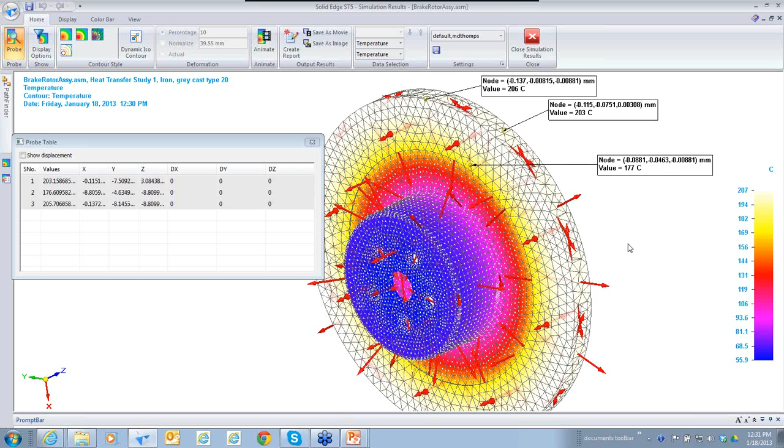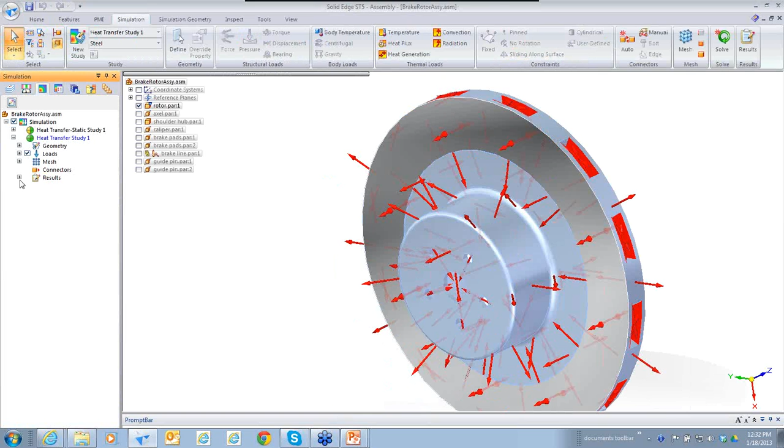So I'm going to go ahead and close these results, and we're going to try to make some modifications. I'm going to reach back over here under my home and say, you know what, under simulation, I'm going to go under those results again - no, not the results, sorry. Close my simulation. What I want to do is turn off these loads for just a moment. There we go. What I want to do is fix this.

So because it's part of an assembly, I'm going to right-click, and I'm going to say I would like to replace it with a copy. So go ahead and check it off, and we're going to call this rotor 2.

This is now rotor 2, and what I'd like to do is edit it. So now I'm going to use my synchronous technology because this is kind of a complex part, and frankly it's got a lot of stuff in it. I'm going to turn on my PMIs for this, and I'm going to make some changes.

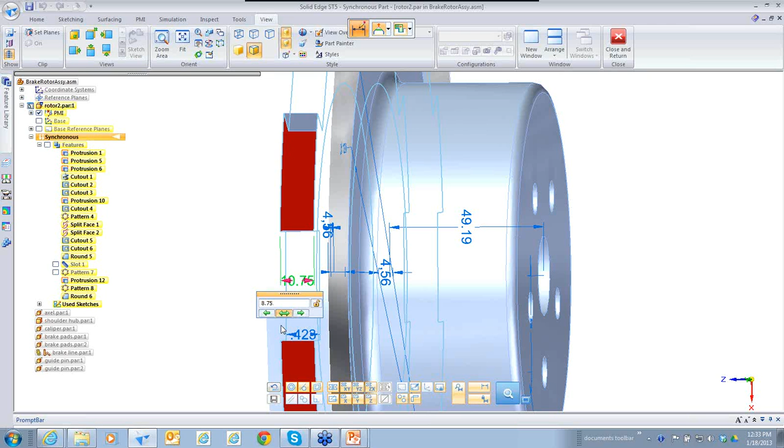I'm going to change this fellow. He was at 10.75, and I'm going to make the sides thicker. I'm going to make that 8.75, and now they come in, giving me a little bit more thickness.

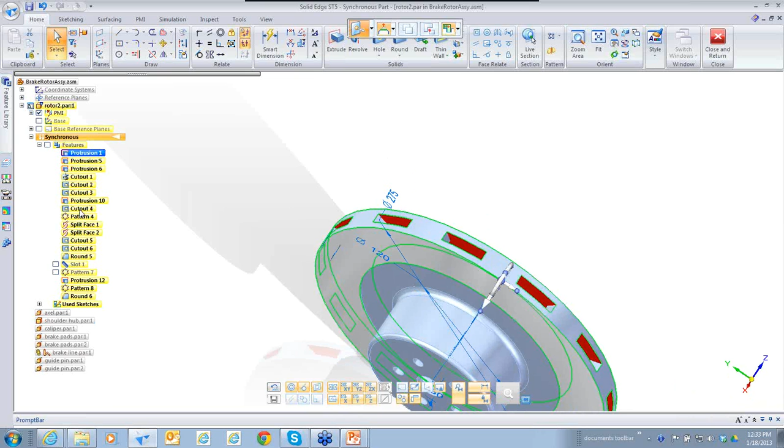Also, I'd like to make some changes to the supports. Let's see, reach over here, and I might choose to... that's not quite what I want. Those are part of a pattern, so I don't want that one. Cut out protrusion.

Let's grab this fellow right here, and I'm going to pull him in. The cool part is because I'm doing the edit, I'm affecting all of them. That looks cool. And then I would probably also like to take that same plane and give it a little bit more support. There we go. Maybe pull this guy out.

Oh, my live rules, right? And pull this guy out, not this way, but this way, probably -20. And that looks great. Now, after I've done this, I'm going to choose close and return again.

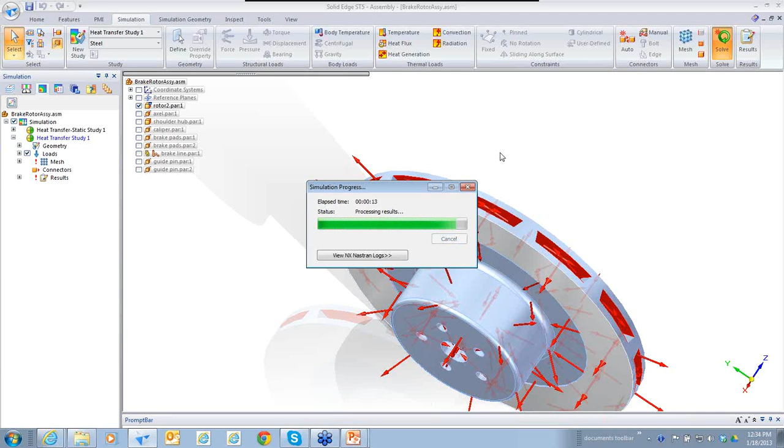I'm going to reach back over here for my loads, and I'm going to resolve again, hopefully with better results. As it goes to solve again, once it does it once, it goes through quicker the second time. We're going to see whether or not I've gotten below 200 degrees as I wanted. And sure enough, I really have. Right at 197 degrees, right at the very tip.

So I've done what I wanted to do, and I don't have a doctorate degree, so you can do FEA also. Those of you that have doctorate degrees, I didn't mean anything by that.

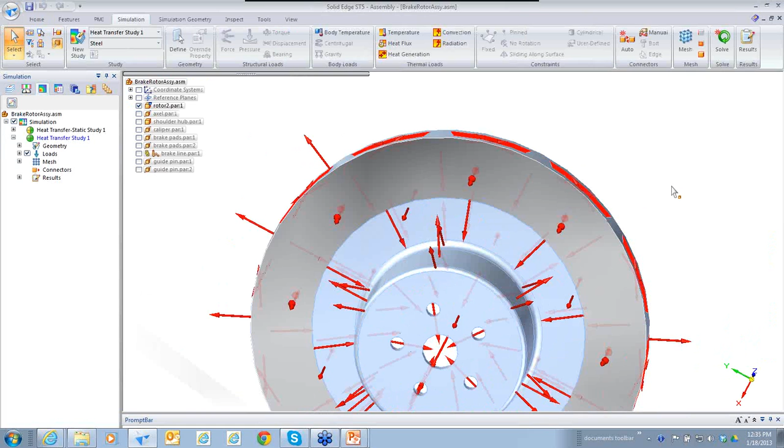So let me go ahead and shut down my Solid Edge, and let's flip through these last couple of slides, because I feel like I've not given you as many slides as you need to have.

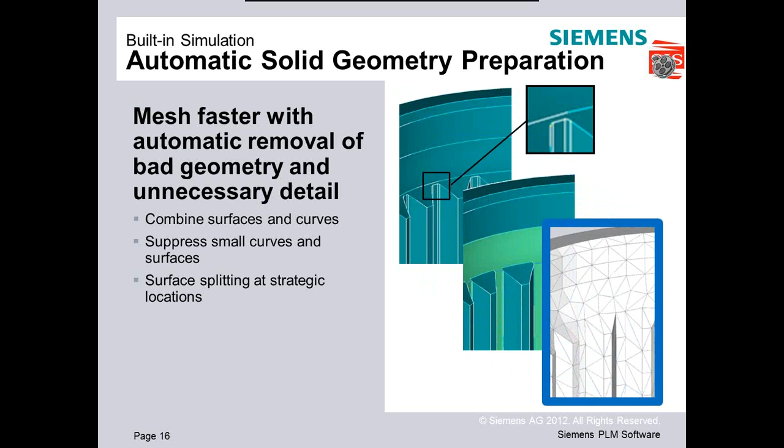The steady state heat transfer is new to Solid Edge ST5, and it's going to be a great tool for you. Automatic Solid Geometry Preparation is also new inside our simulation, where we can go in and simplify geometry. These are tools you really need if you're going to do FEA. We can also do mixed meshes, mixing our sheet metal meshes with our solid meshes.

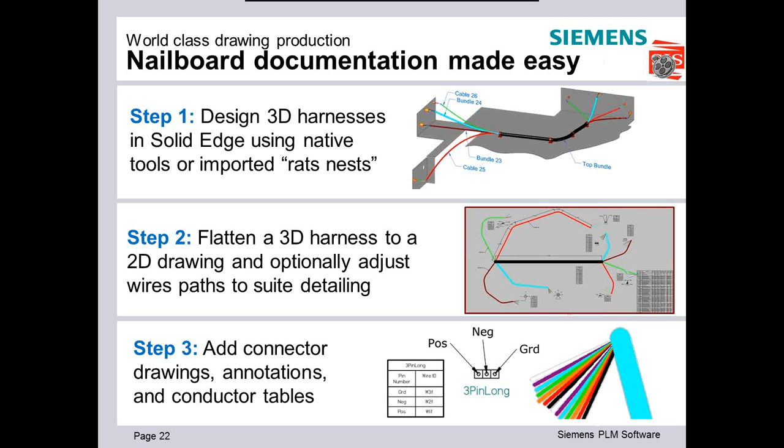Though I'm not an automotive expert and I don't do a lot of nail board work, if you are in the automotive industry, maybe we need to do a separate demonstration just for you, because we can now do nail board drawings, and with the capabilities it has, it's fantastic.

Those of you that have long tables of bills of materials, we now have tools inside the drafting environment to automatically create sheets for our bill of materials.

Showing you the alternate drawing positions and the dimensions. Well, the dimensions there are 250 plus customer requests that were added. So those are cool also.

So here, over 1,300 reasons why Solid Edge ST5 is what you want to upgrade to.

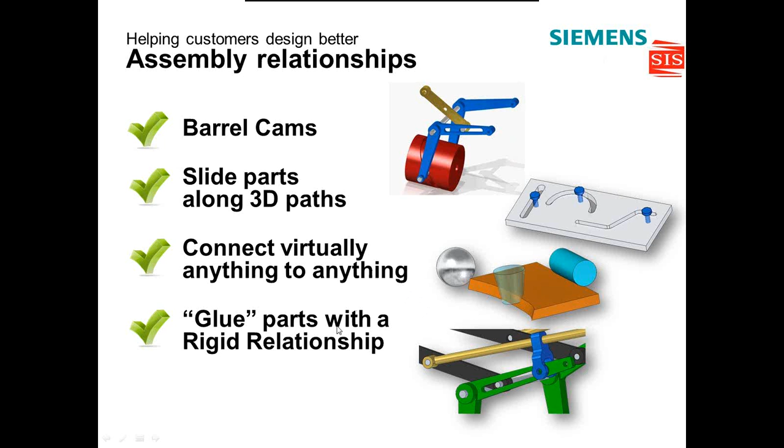Some things that I haven't shown: well, I didn't show you the fact that we now have a new barrel cam relationship. I did show you the slide on 3D paths. I didn't show you that we can now connect to almost virtually anything. And I also didn't show you that we can now glue parts together so that they're rigid.

I did show you the fact that we can set our default open size for our assemblies, and it opens up with much less time lost.

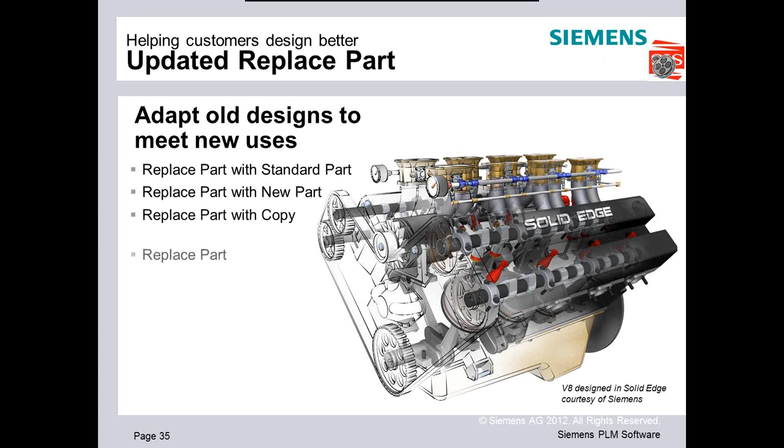Replace part, fantastic. I'm starting to use it all the time, and I know that you will also. The ability to fix bounded surfaces, awesome. The ability to do associative assembly mirroring, fantastic.

Didn't show you this one, but now we can go ahead and from an assembly, we can actually do things like show assembly configurations, so that if in your assembly you have center lines shown, you can show those in the draft.

If you didn't know about this and you own an iPad, go out to the iTunes store, because there's a free app called the Solid Edge Mobile Viewer. It is absolutely beautiful. If you do any bit of sales or marketing, or if you're out on the floor not connected to your network, this is fantastic. It gives you the ability to zoom in, zoom out, rotate, see the bill of material or structure, select things, and see section views. All that, and it's free.

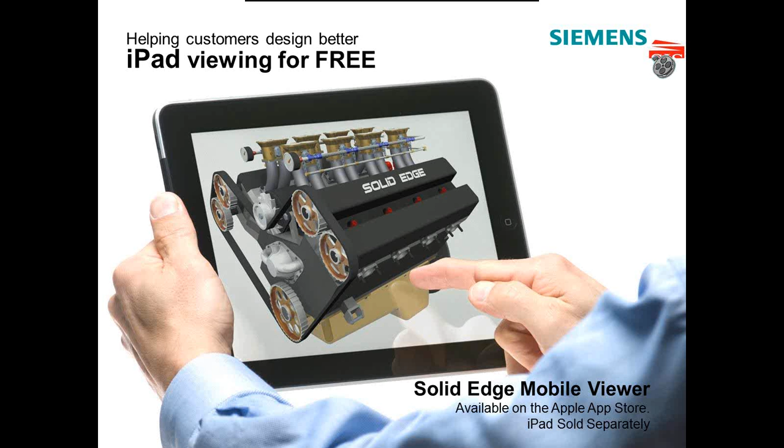So, with that said, Greg, are you there? Yep, I am here. Thanks, Cecil. You did a great job.

I know we ran a little over, but we had a lot of material, and this is only scraping the surface of all the new capabilities in ST5. A lot of it is centered around flexible, synchronous technology, and simulation, which she showed you a little bit. The drawing capabilities keep improving because Siemens realizes that drawings are still a major component of everyone's daily life. And the enhancements we talked about are really driven by you guys, so it's key that you stay involved.

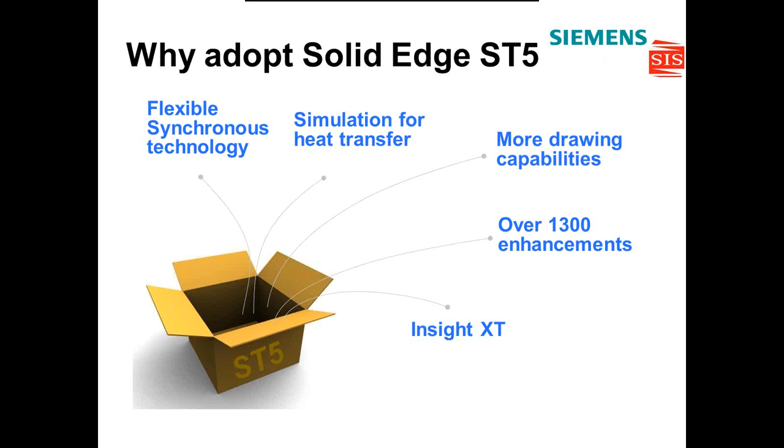We didn't really talk about Insight, which comes free right now with Solid Edge, but with ST5 there's something called Insight XT. That gets you a little closer to a PLM environment for Solid Edge. It really controls things at the item level, lets you package more things together, and start creating workflows that can be productive, all in a SharePoint environment, which you probably already have invested in for your business.